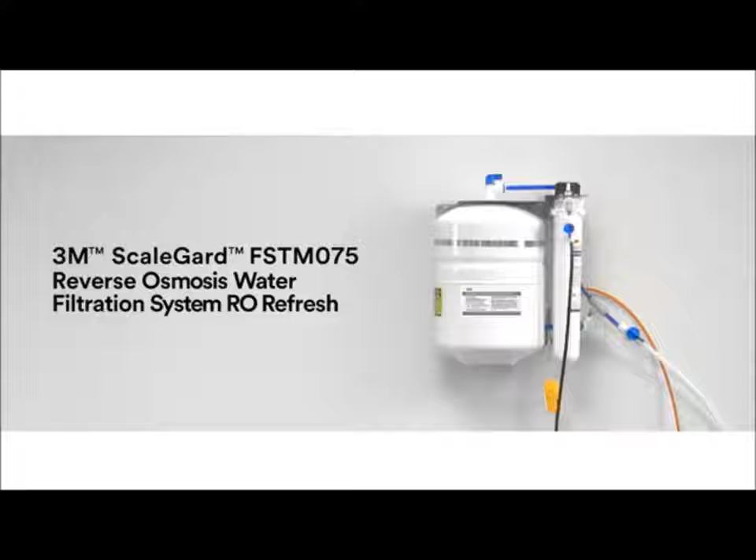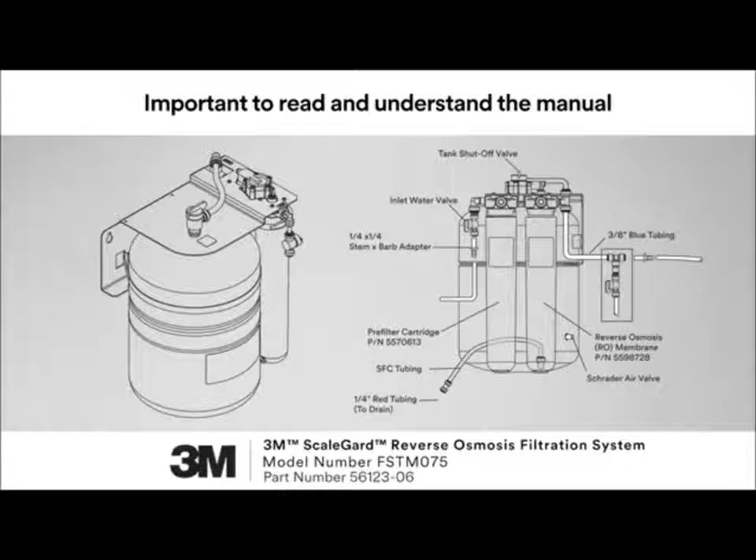The refresh process was developed to confirm the 3M ScaleGard FSTM075 Reverse Osmosis Filtration System is installed correctly and is delivering water to your equipment that meets the correct water specification. Prior to actual installation and use of any 3M product, it is important to read and understand the product installation and use instruction manual. This video will take you through the refresh process step by step to confirm the RO system is installed correctly and performing to specification.

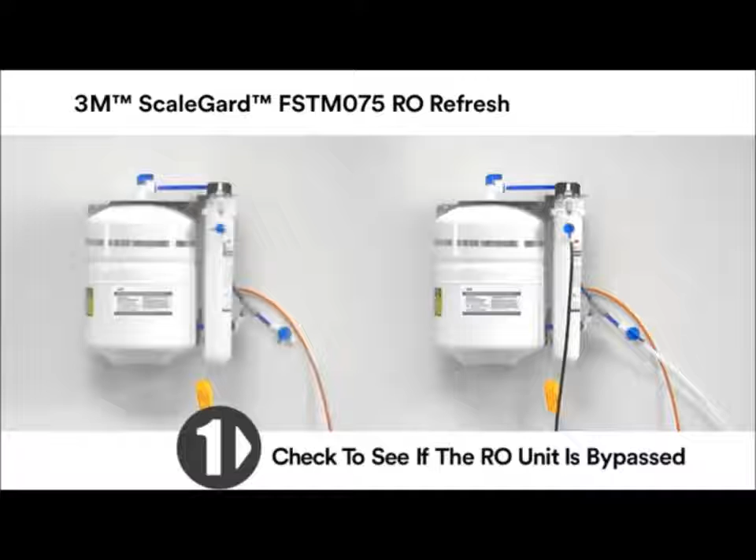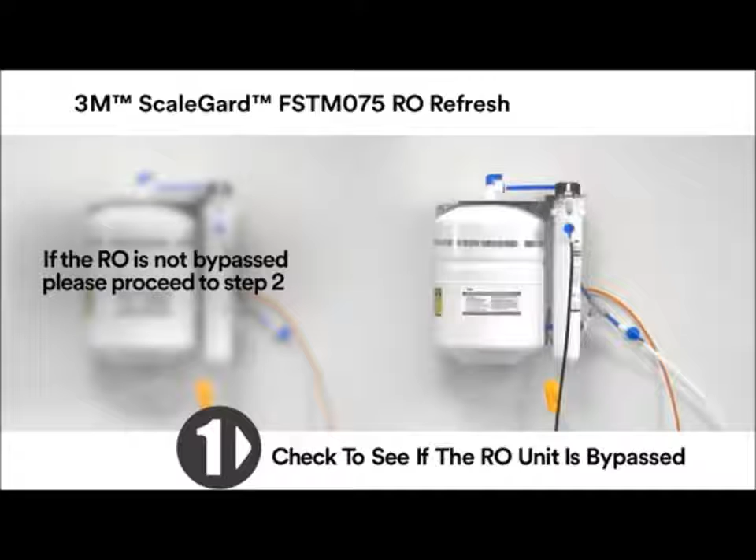Step 1. Check to see if the RO unit is bypassed. If yes, please contact the manager or owner for instructions on how to proceed. If the RO is not bypassed, please proceed to Step 2. Step 2. Measure the TDS of the tap water and the RO out water. Use a pocket TDS meter.

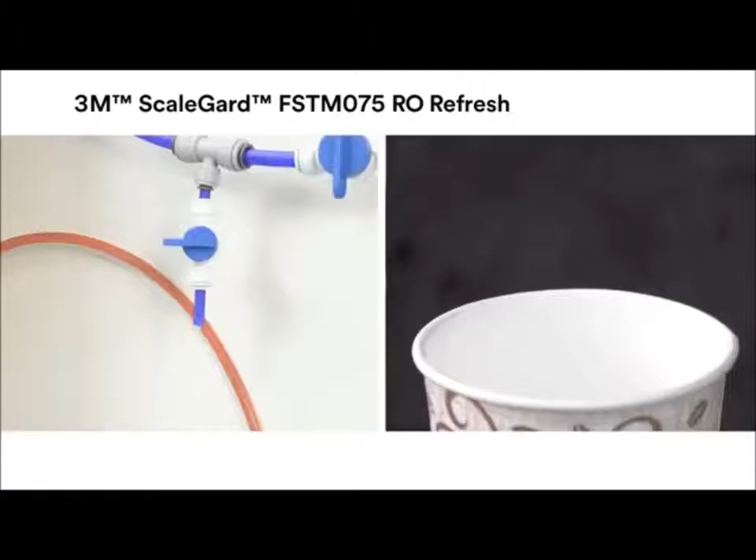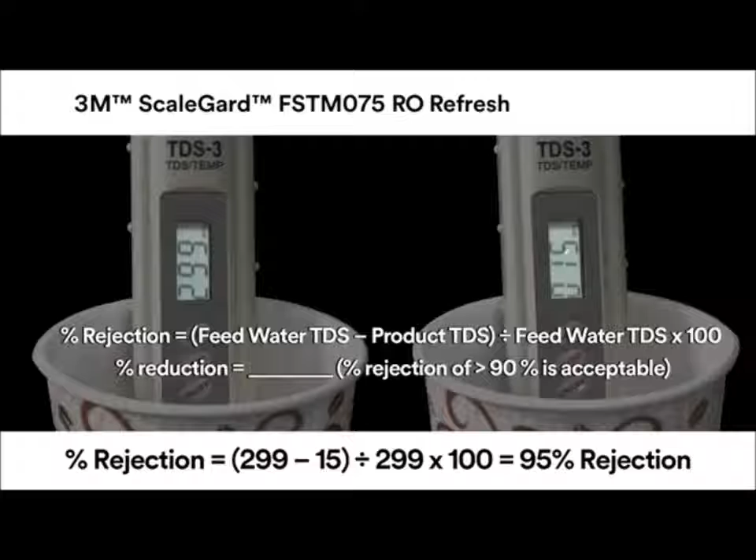Is the tap water less than or equal to 100 TDS? If yes, the RO unit is optional at this site. Contact the manager or owner for instructions on how to proceed. If no, proceed to Step 3. Step 3. Test and record RO feed water pressure. Use any standard water pressure gauge supplied by the service technician. 60 to 100 psi recommended.

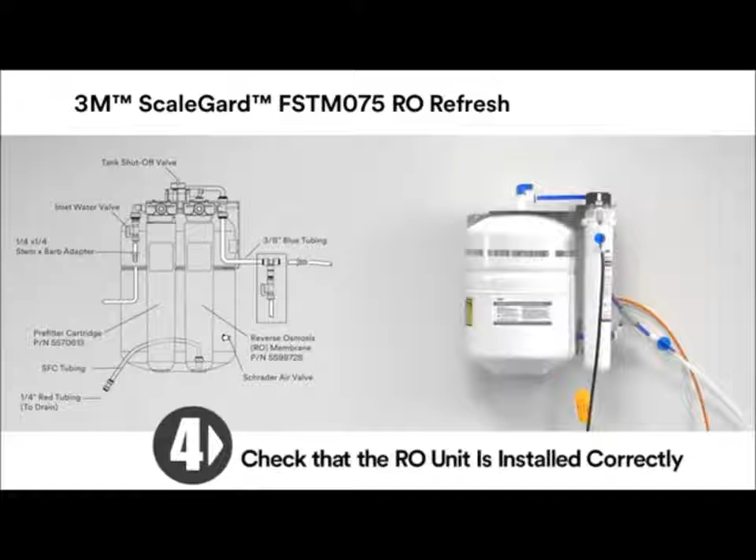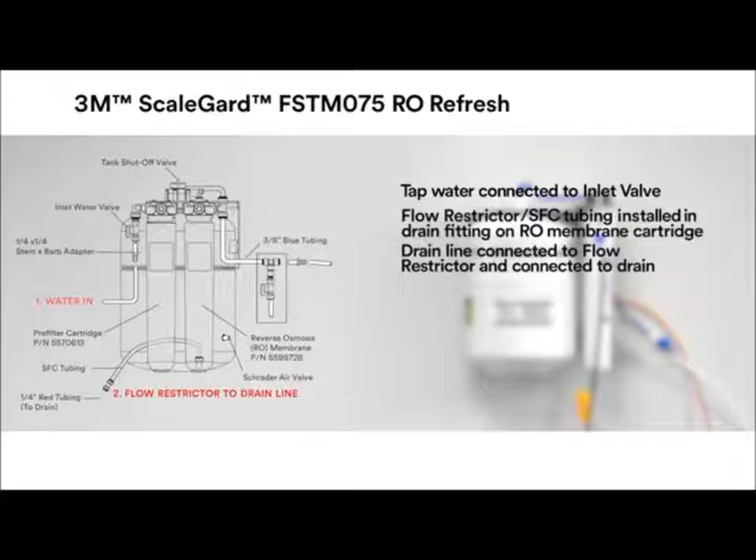Step 4. Check to confirm that the RO unit is installed correctly. Please check each of the following. 1. Tap water connected to inlet valve. 2. Flow restrictor tubing, SFC tubing, installed in drain fitting on RO membrane cartridge. Drain line connected to flow restrictor and connected to drain.

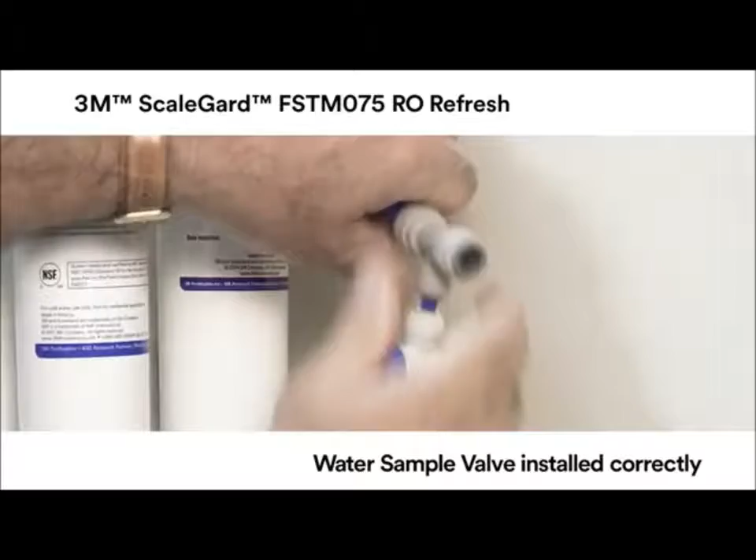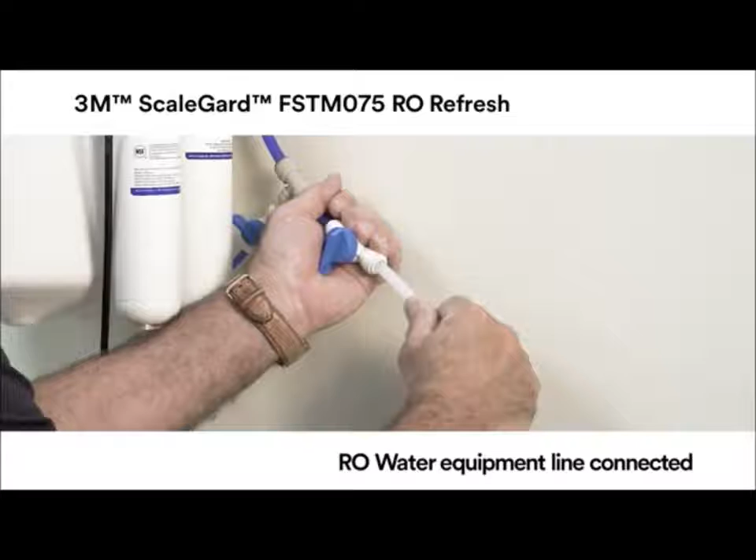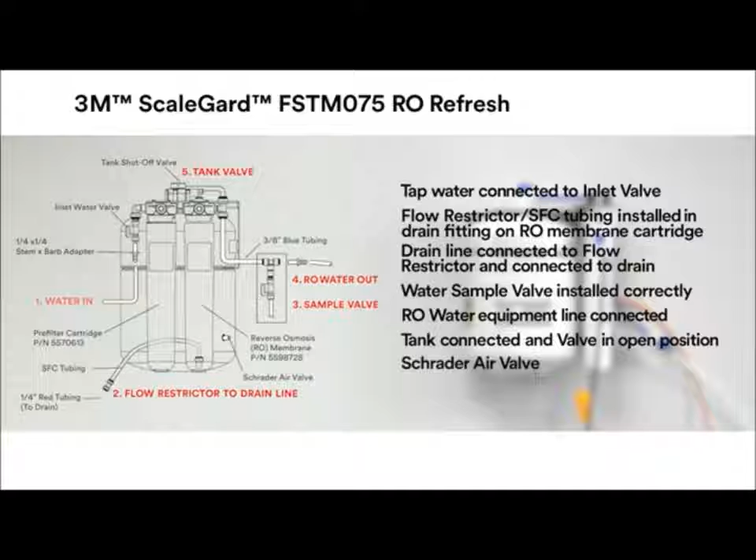3. Water sample valve installed correctly on the RO water equipment line. 4. RO water equipment line connected to food service equipment. 5. Tank connected and tank ball valve in the open position. 6. Schrader air valve. Empty water from RO tank, then set to 8 to 10 psi air pressure.

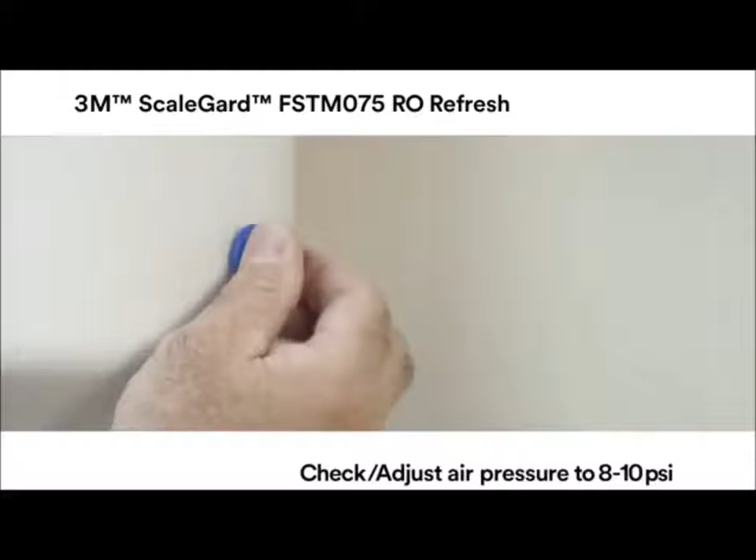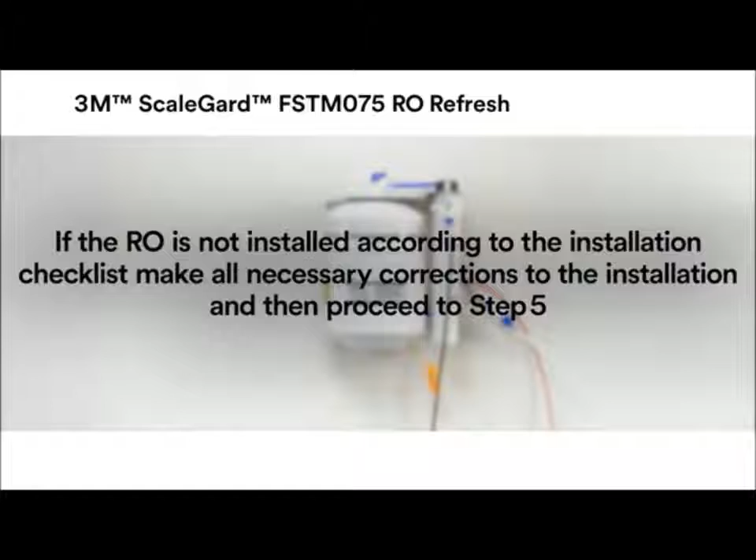Note: if the RO is not installed according to the installation checklist, make all necessary corrections to the installation and then proceed to Step 5 and complete a preventative maintenance on the RO unit. If the RO unit is installed according to the installation checklist, proceed to Step 5 and complete preventative maintenance on the RO unit.

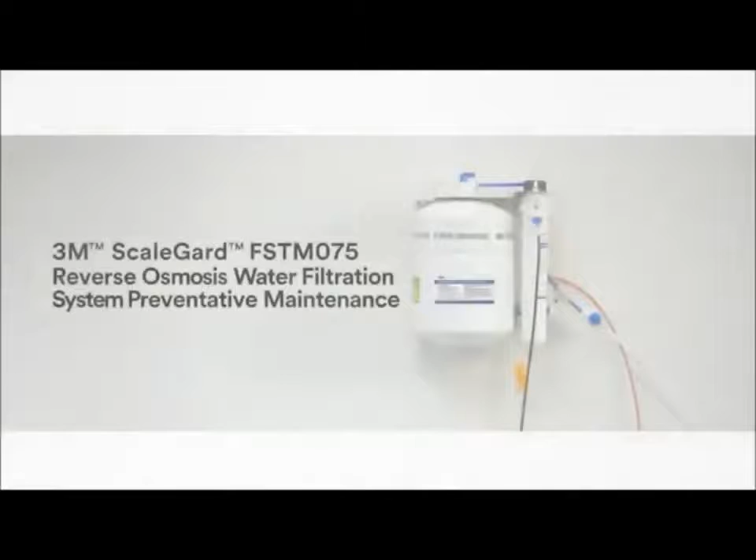The demonstration shown in this video is intended to provide an overview of the preventative maintenance required for the 3M ScaleGard FSTM075 Reverse Osmosis Water Filtration System. Prior to actual installation and use of any 3M product, it is important to read and understand the product installation and use instruction manual.

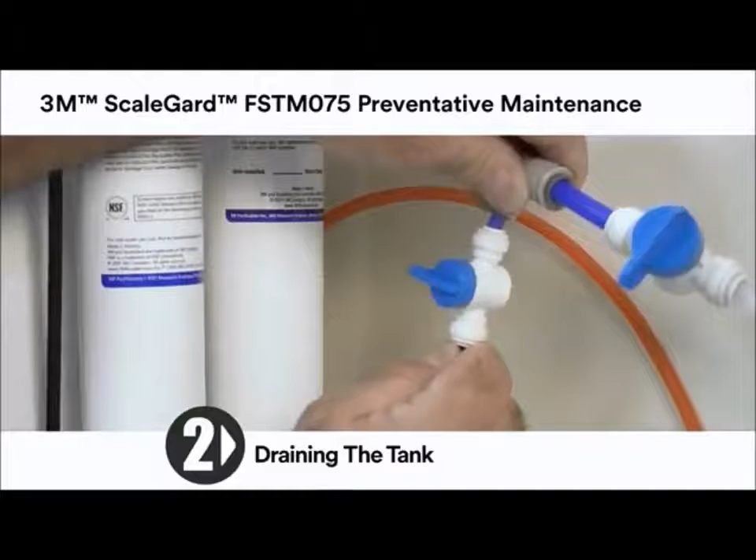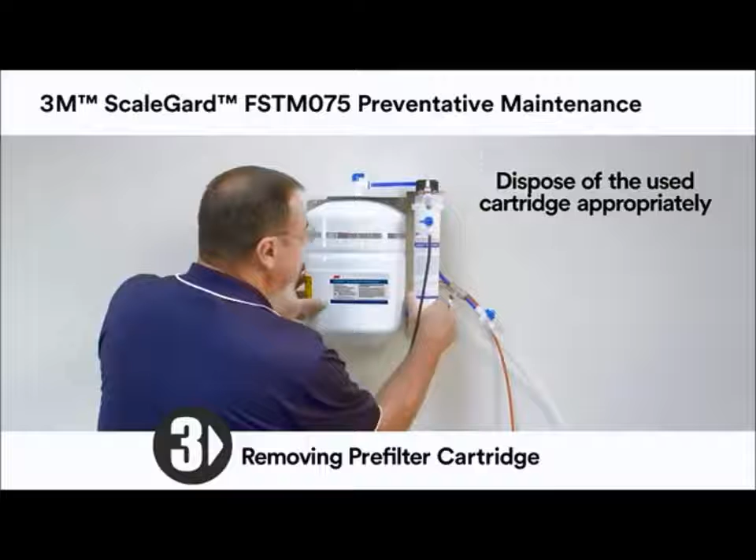First, shut down the FSTM075 system. Close the inlet water valve and shutoff valve in the equipment line if one is installed. Then empty the tank. Divert the water sample valve to a bucket or drain and open the valve. Drain until the water flow stops. To remove the pre-filter cartridge, turn it 1/4 turn to the left and pull it down.

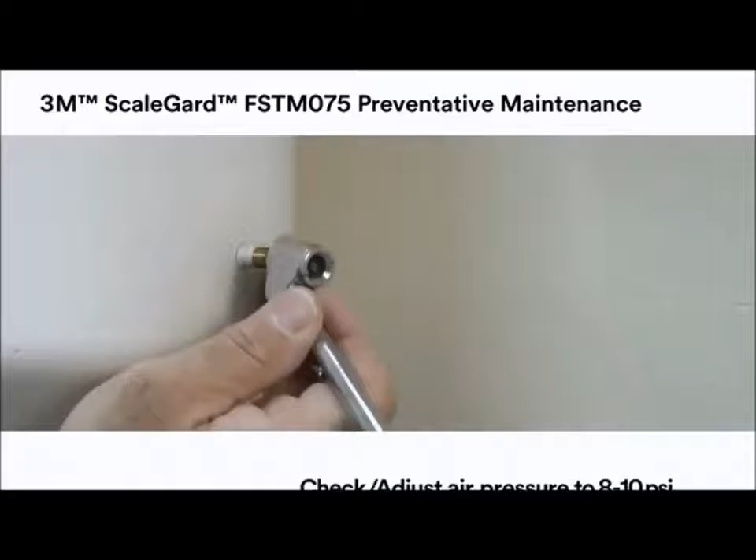Then test and adjust the air charge in the tank. First, locate the Schrader air valve on the tank and remove the blue cap. Using a standard pressure gauge to read the tank air pressure, adjust the air pressure to 8 to 10 psi. Then replace the blue cap on the Schrader valve. It is necessary to change the pre-filter cartridge every year during your annual preventative maintenance.

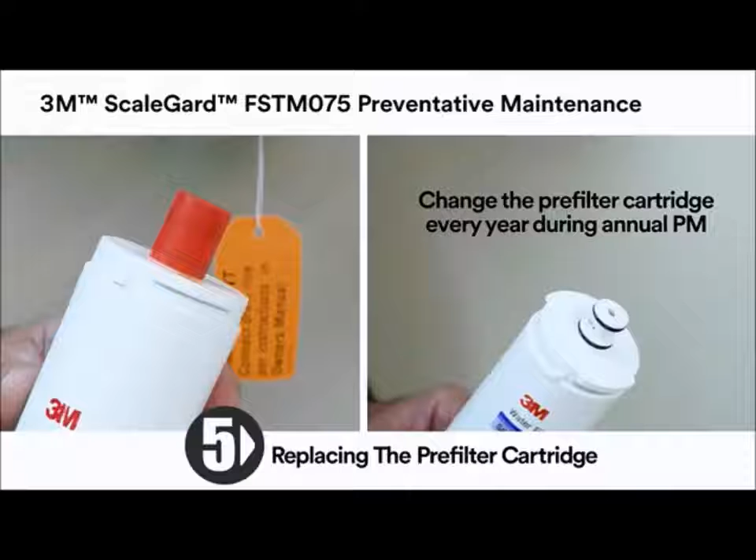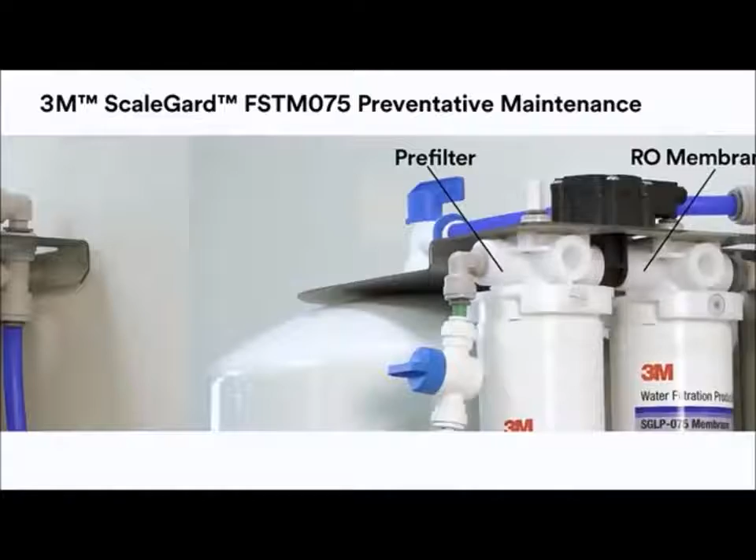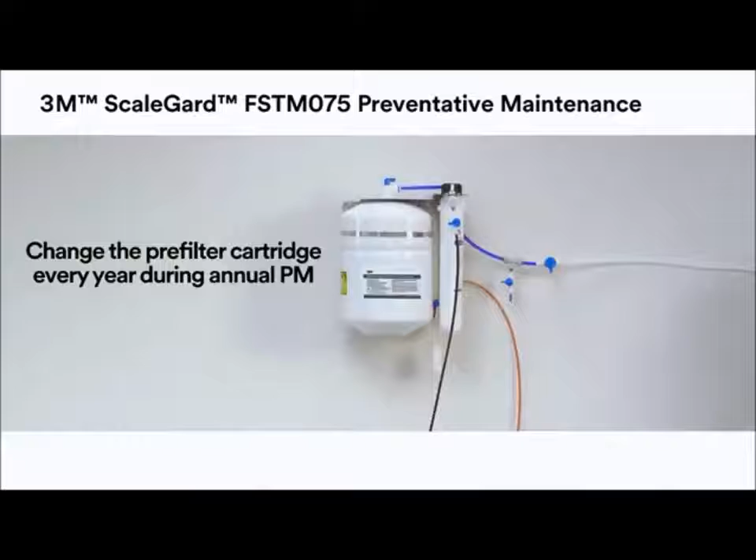To install a new pre-filter cartridge, remove the red cap and moisten the O-rings with water. Insert the new pre-filter cartridge into the pre-filter head. Be sure the ears on the new cartridge line up with the spaces in the head. Turn the new cartridge 1/4 turn to the right until it stops. Mark the installation date using a permanent marker on the new pre-filter cartridge.

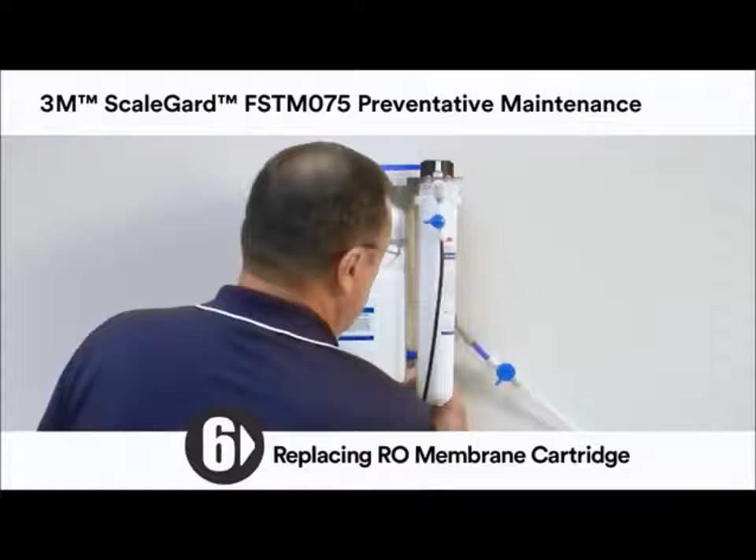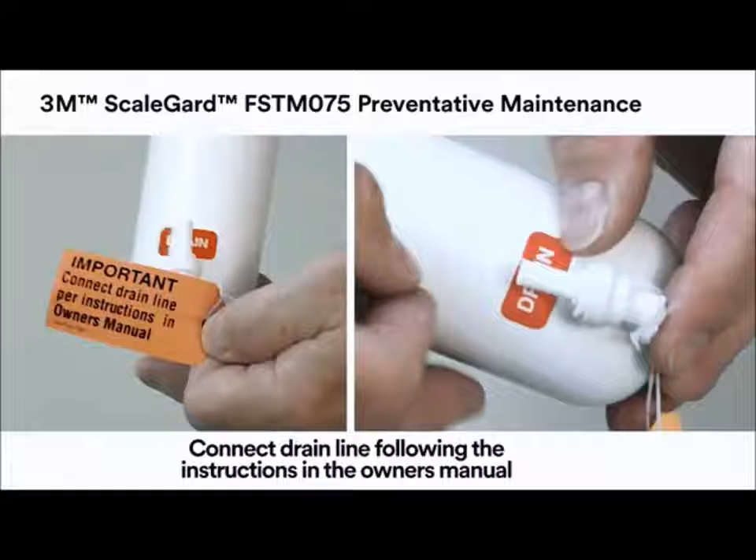Change the RO membrane cartridge every other year during preventative maintenance. Remove the RO membrane cartridge by turning it 1/4 turn to the left and pulling down. Remove the red SFC tubing with the drain line connected from the cartridge drain fitting. To install the new RO membrane cartridge, remove the 1/4 inch plug from the cartridge drain fitting. Insert the red SFC tube with the drain line connected into the drain fitting.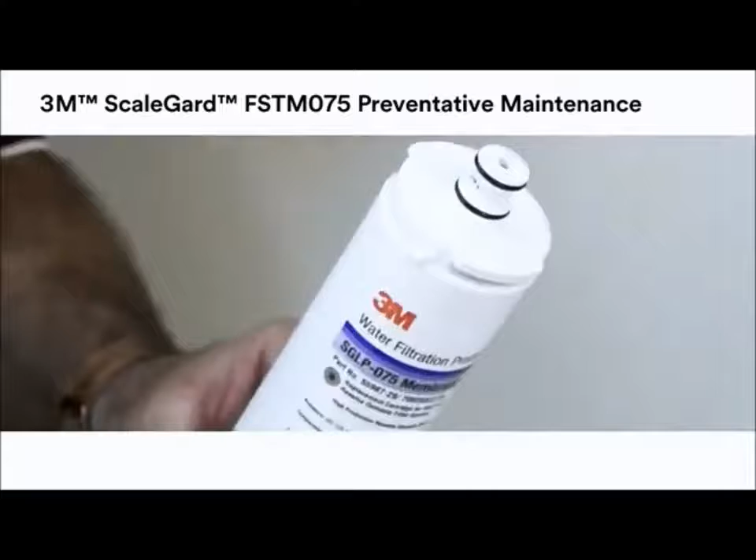Moisten the O-rings with water and insert the new RO membrane cartridge into the RO membrane cartridge head. Be sure the ears on the new cartridge line up with the spaces in the cartridge head. Turn the new RO membrane cartridge 1/4 turn to the right until it stops. Mark the installation date using a permanent marker on the new RO membrane cartridge.

To restart the RO system, divert the water sample valve to a bucket or drain. Open the inlet water valve and allow the water to flush from the water sample valve according to the instructions included on the product performance data sheet. After flushing, close the water sample valve and open the shutoff valve in the equipment line if one is installed. Check for leaks and repair as necessary.

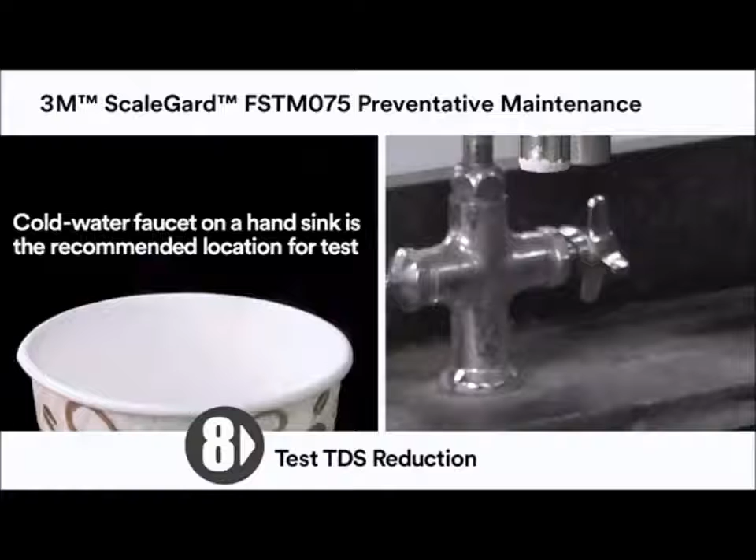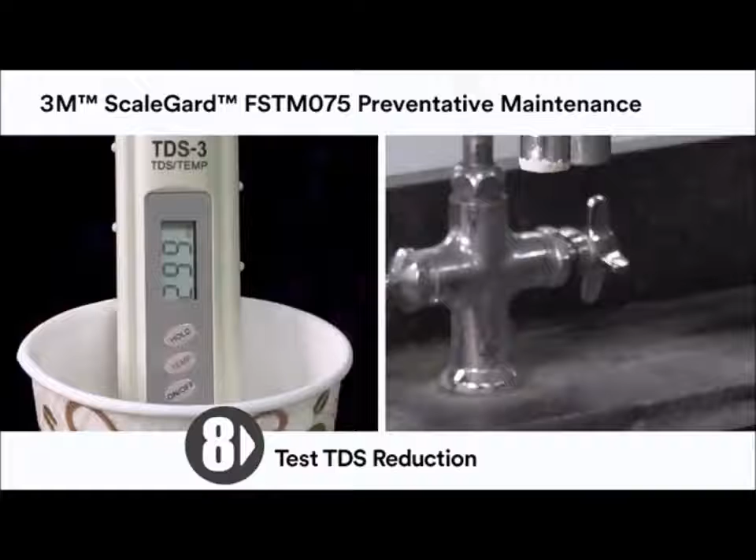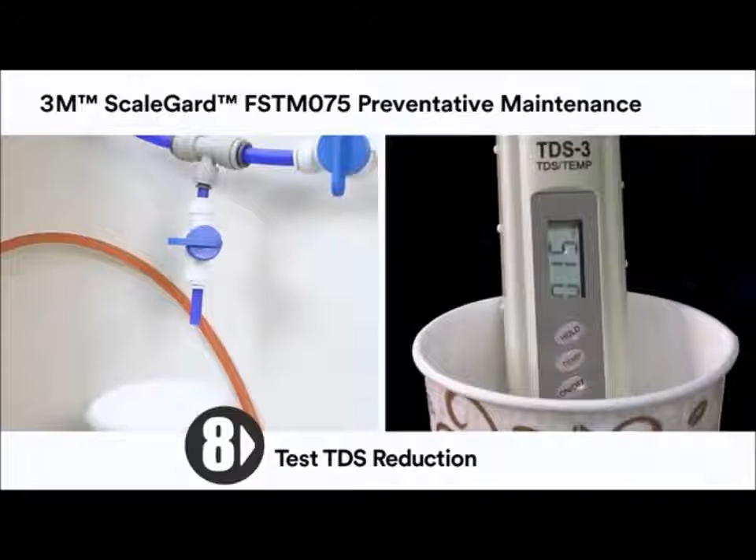Allow the FSTM075 RO unit to operate for 60 minutes to fill the tank and cycle off before operating the food service connected to the FSTM075 RO. This completes the overview of the preventative maintenance required for the 3M ScaleGard FSTM075 Reverse Osmosis Water Filtration System. For additional annual maintenance procedures, please refer to the Installation and Use Instruction Manual.